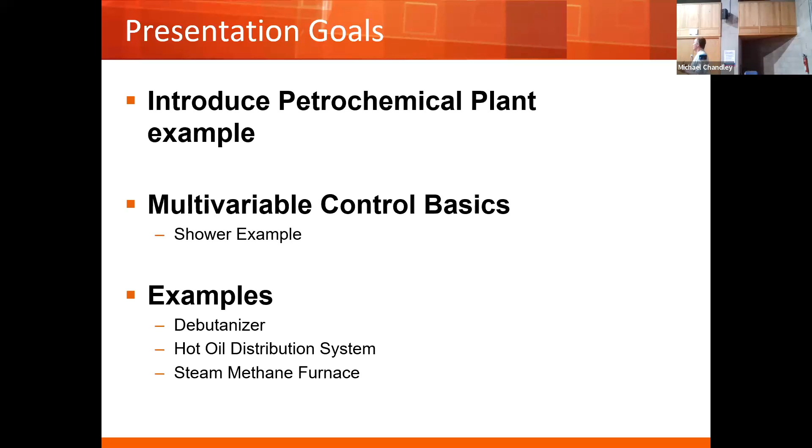First, I'd like to introduce the project that I was working on in the Middle East. And because multivariable control was such a huge part of this project, with very complex applications, I want to first discuss the basics of multivariable control. Then I have three examples I'd like to work through: one is on a column, a debutanizer column; the second is more of an optimizing control application, simple but it makes money; and the last one is a unique one done quite a few years ago on a furnace. More than anything else, I want to seed the discussion so you can be thinking about this as you're going through your schooling, and also what potential applications you might have.

So let's talk a little bit about the plant that I worked in. I worked at a company called Sadara — I actually have the shirt on today. Sadara was a joint venture between Saudi Aramco, which supplied the money. Everybody knows Saudi has lots of money; they supplied $20 billion to start the project, adding another 10 billion probably later on because there were overruns. So they supplied the cash. The other JV partner was Dow Chemical, who supplied the technology and some of the people.

Now, a project like this was mammoth. I want you to physically think about this: a rectangle of 2 kilometers by 3 kilometers long, just full of process equipment. I think it was about $13 billion worth of physical assets actually in the plant, with 26 process units — half of those were the first of their kind in Saudi Arabia. There was so much pipe in this plant that it would go from Cork to Dublin 10 times, and there was enough wire to go from Riyadh all the way to London. At the height of the project, there were 60,000 workers on site from 120 different countries. So needless to say, this was a pretty big project.

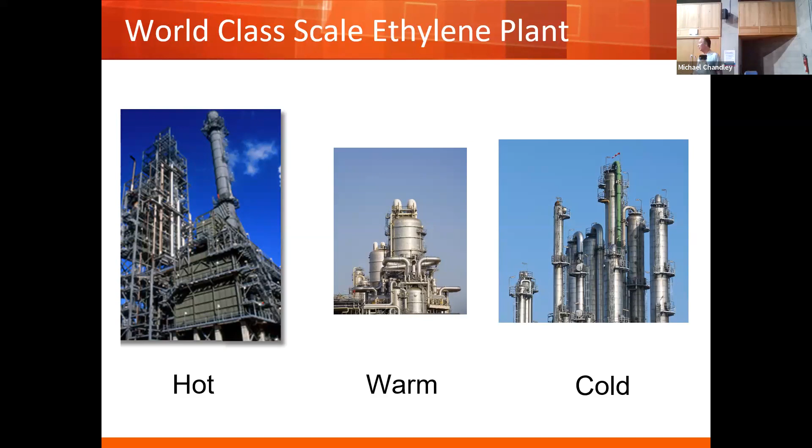All right, so what we have here is a lot of distillation towers that are there. And so the first tower was a depropanizer. And this was the most complicated depropanizer I'd ever seen, and I'd run into quite a few of these in the refining industry. And then there's a debutanizer, which is pretty easy. You're going to see not quite that example, but something similar.

We had a deethanizer. We had two deethanizers. It was an easy tower. And then we get to the demethanizers. The two demethanizers are getting to be more complicated. Now we're starting to get down to that minus 100 type of variable right there.

Then we have the C2 splitter. The C2 splitter was one of the more interesting towers I've ever seen in my career, and I've seen a lot of distillation, because the C2 compressor was literally part of the process. It was the top section after the vapor exited the tower, went through condensers, and then it took part of that liquid and sent it back as cooling through the rest of the process. And then we pulled some off as product. So that one was just super, super interesting.

And the reason multivariable control works as well as it does is wherever you have a lot of interaction, it's almost impossible to do it very well through traditional controls.

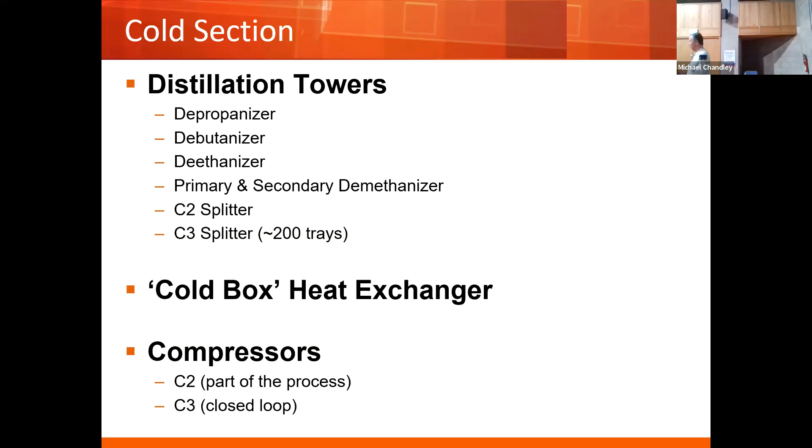All right, so what is multivariable control? It allows us the ability to simultaneously control multiple hard constraints, those variables that we normally think about controlling to a set point. In the controller itself, it's really not a set point per se, it's a range, and you can collapse them together, then you get real set point control.

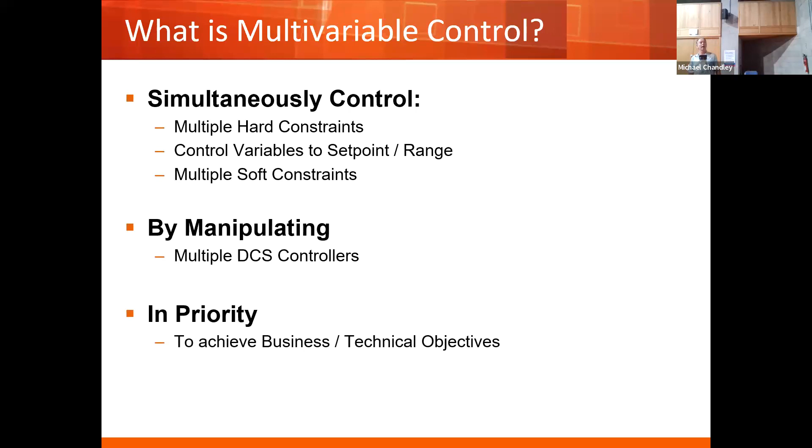There's a lot of flexibility in the way you set this up, with multiple soft constraints. The only difference between hard and soft is the ranking that actually occurs. So by manipulating multiple DCS controllers, most of the time it's DCS controllers—it doesn't have to be, but it normally is—in a prioritized fashion to achieve the business and technical objectives, using plant-derived models. So that's multivariable control in a nutshell.

Now, all of us are familiar with multivariable control. We practice it hopefully every day when you get in the shower. When you're taking a shower, you want to control temperature to a pretty narrow range, and you also want to control flow—you don't want it too low, I've had that in various hotels I've been in, that's not a lot of fun. But you don't want it to be a fire hydrant either, so you want some range.

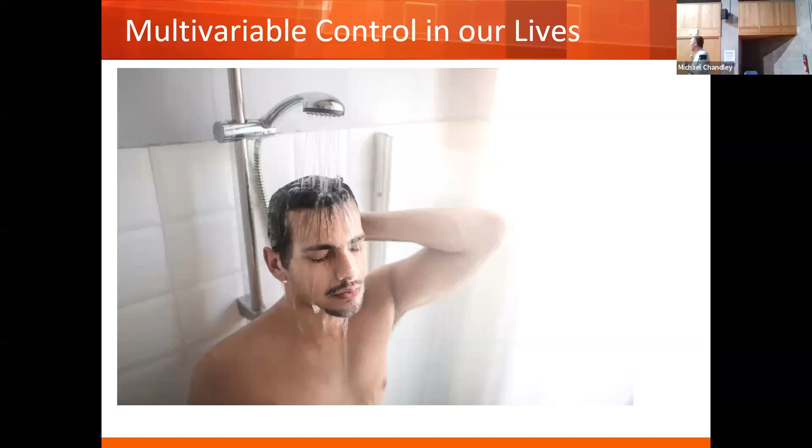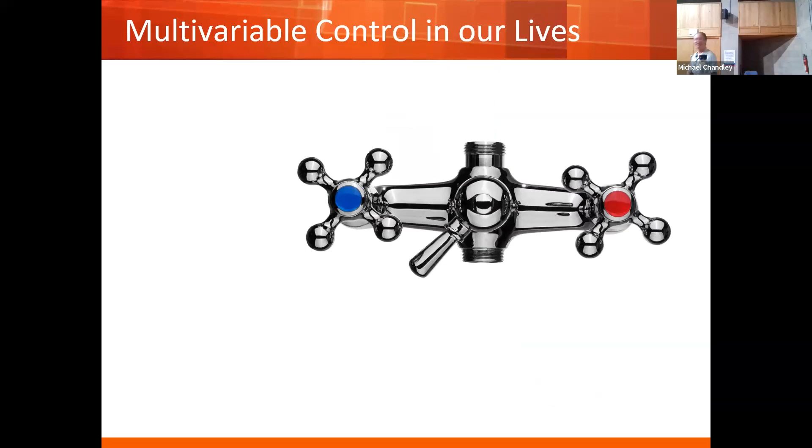Now, temperature is a little bit more important than the flow, and you do that by literally manipulating a cold and a hot water valve. In the parlance of process control, we refer to MVs as handles. So this is an interesting situation where it literally is the hand that's there. And there are certain disturbances that may happen—I hope that doesn't happen to you often when you're in the shower, because it can cause a lot of different problems.

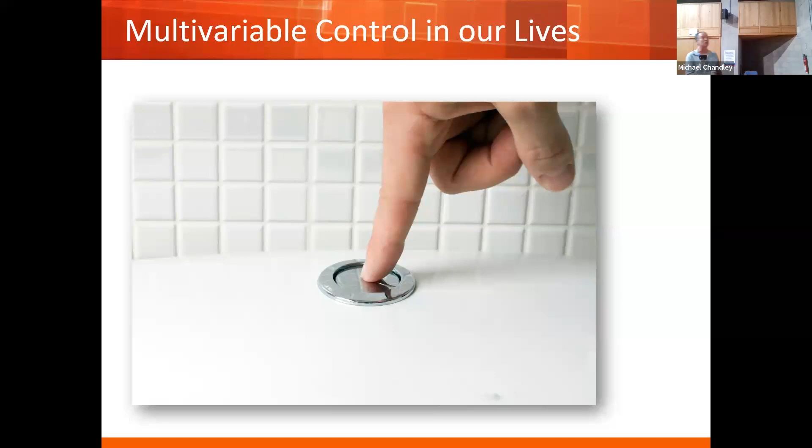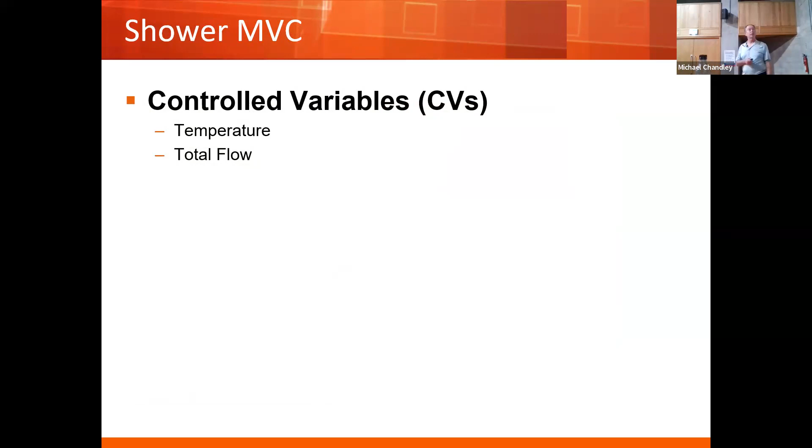All right, so that's the structure. This is something I'm going to use throughout the rest of the presentation, and this is the structure we want to think through these problems with. The first line in the controlled variables is going to be the highest priority, so temperature is the highest priority, and flow is the second priority. Now, manipulated variables, we already talked about those. And the disturbance variable is the water pressure that exists.

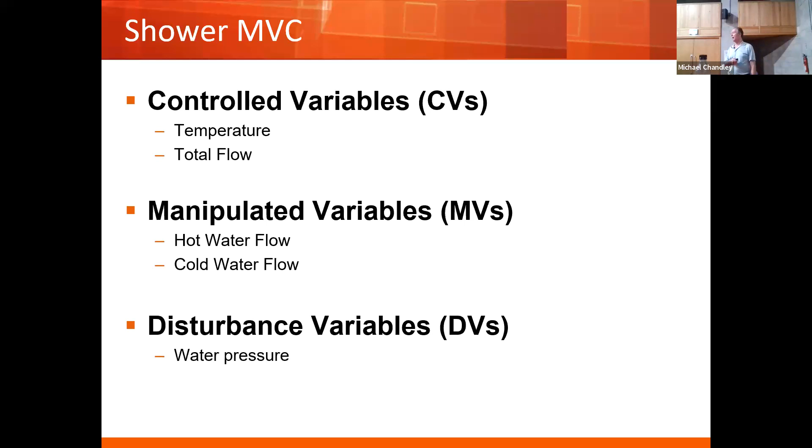Now, this is a model-based controller. I'll talk a little bit later about how these models are actually derived, but I want you to think about these as the dynamic relationships for a nominal change in a manipulated variable. So how do we read this? The rest of the presentation, these are the CVs in the columns—the one farthest to the left is the highest priority, and as we move to the right of the screen, they become lower priority. Then we have manipulated variables, hot and cold water, and the disturbance, which is really the water pressure—somebody pressing the toilet button, for instance.

So if we have a nominal change in the hot water flow, this is the dynamic response you see for the temperature: there's a short dead time, then it rises up, and we obviously increase the temperature from doing that. Same thing with flow—short dead time, then it increases up. Same thing with cold water, except the temperature obviously goes the opposite direction.

Now, down here for the water pressure, you have something that's very important: we start off at one value, go through a dynamic change, and come back to exactly the same value. It's called a zero gain model. These are very challenging to work with in real life, but you often see them as part of a control scheme.

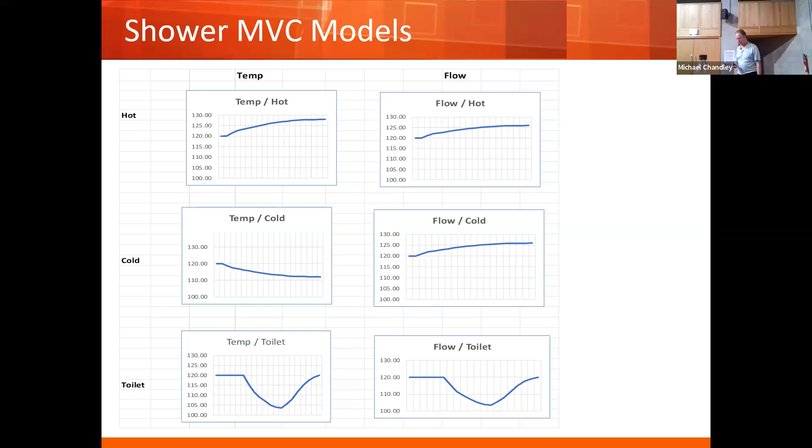Okay, so that's the basics of control. Let's go ahead and work through our first example. This is a debutanizer—there are 1,000 debutanizers out there. I've probably seen 100 of them myself in my refining work; each refinery has 2 or 3 of them.

So a debutanizer would normally handle what's termed wild gasoline. The idea is to separate the light ends—in this case propane and butane—from a gasoline stream whose vapor pressure has been adjusted. Now, in any distillation tower, we normally control both compositions at the same time, at least in a theoretical fashion.

However, in real life, you will have to give up on one and only control the other. There actually is a priority between the two. Because this gasoline stream is going to a certain tank, it can't take high vapor pressure. So it is the highest priority compared to the propane butane stream on the top. I want you to remember that because we're going to talk about that in a minute.

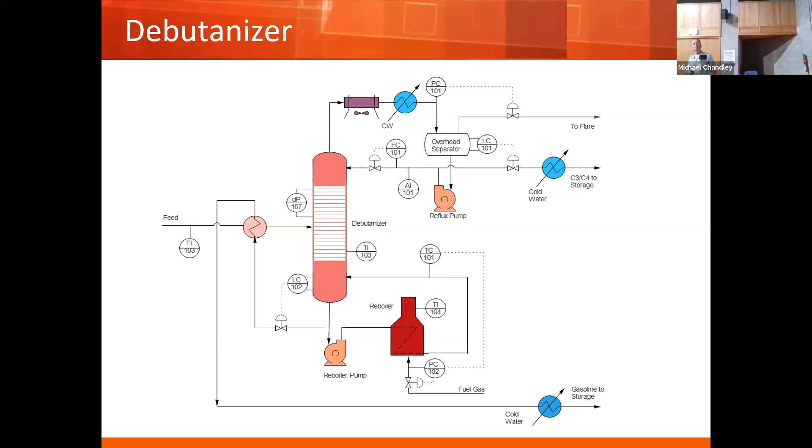Now, the word 'process' comes before the word 'control' for a reason, because it's the more important of the two words. We must understand the process before we can do the second part, and that is control. So one of the most important things we do on a project, and at Sadara we went through this many times, this is a simple example.

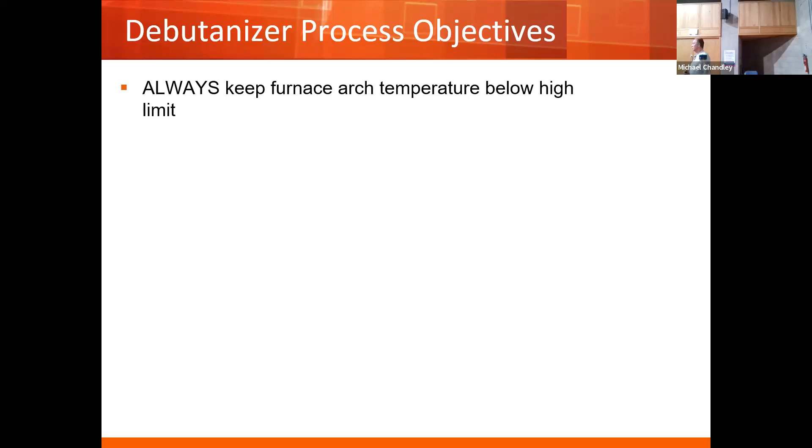We went through this many times where we had to make sure we got these exactly right. As we talked about this example, safety comes first. We're not burning down the furnace, so we have to keep the furnace arch temperature below its high limit. Next is an operational issue: we can't run a tower if it's flooding. So that's the next priority, and they are in exactly that order, right?

Then we get to the composition at the bottom of the tower. We already said that was more important than the top composition. And the last one, we know from chemical engineering that if we minimize pressure on a tower, we can reduce the energy consumption for the tower. So if we actually have an extra variable, maybe let's go ahead and reduce pressure on the tower. So this is the list of priorities.

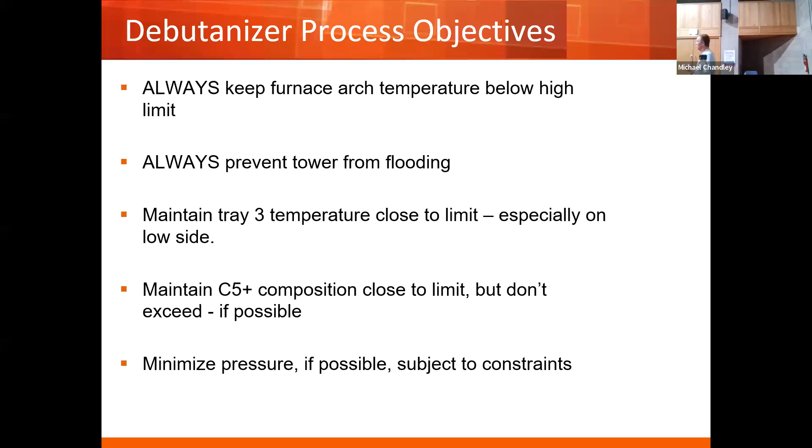Towers like the C2 splitter and the C3 splitter have a list of priorities about three times longer, and it entailed much debate with the operations people, who honestly kept changing their mind because they didn't understand how to work with it. So it took a while to work through it, but at the end of the project, everybody was truly on board.

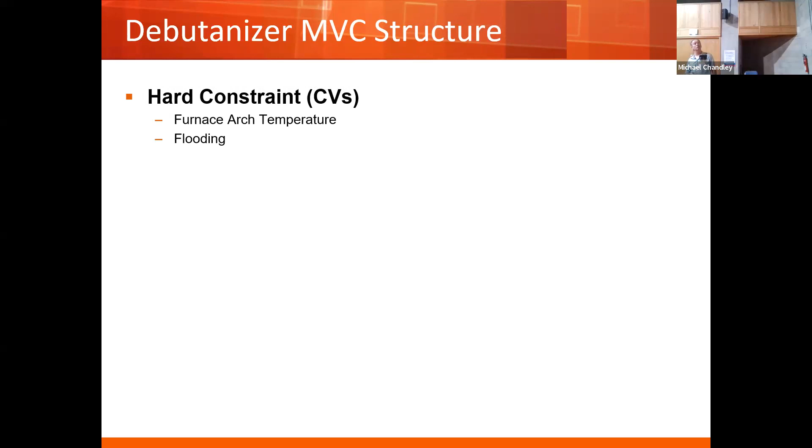Now we go from this structure, hard constraints, the order I talked about, arch temperature and flooding. Controlled variables are now controlled, roughly to a set point. These are the two compositions.

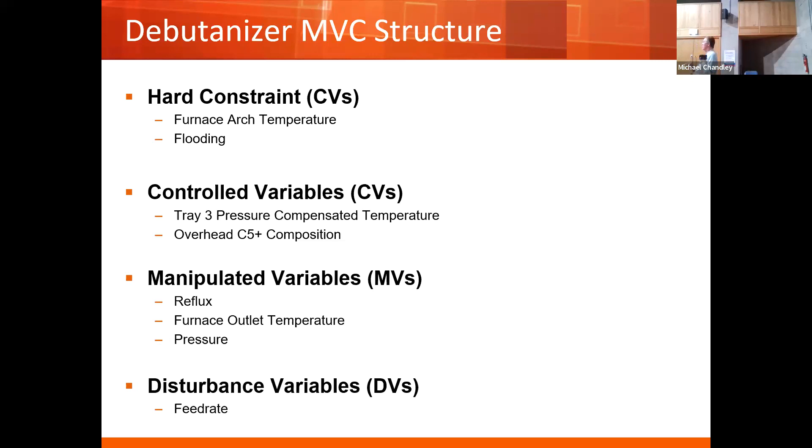Then the manipulated variable—it's a little older presentation than I originally had, so I changed it and saw my own error in there, but let's not worry about that. We had reflux, and then I adjusted it and changed it to be the furnace outlet temperature. Then there's a disturbance variable, feed rate. The feed rate comes wild to us from the bottom of the depropanizers. We have no control over it, but we need to adjust for it.

Now, something you're very familiar with mathematically becomes very important in a control context: degrees of freedom. If you have regular basic controls on a tower, like using reflux to control composition at the top or temperature control at the bottom, those are what we call SISO controllers—single input, single output, fairly straightforward. We're now in the MIMO world, where we have multiple inputs and multiple outputs.

So in general we have three cases. The first case is when the number of MVs is greater than the number of active constraints plus the number of things we want to control as set points. Active constraints actually mean something, because constraints can be there—we may be close to flooding, or we may be very far away from it. Same thing with the arch temperature constraint.

So if we have more MVs than CVs and constraints, this is nirvana. We can control all of our CVs and their constraints, and with any extra degrees of freedom—MVs left over—we can move in a direction that we want to. In this case, it would be pressure.

If we have a square problem, then we can solve the problem the way it is, but we lose that ability to use those extra MVs because they're needed for control at this point.

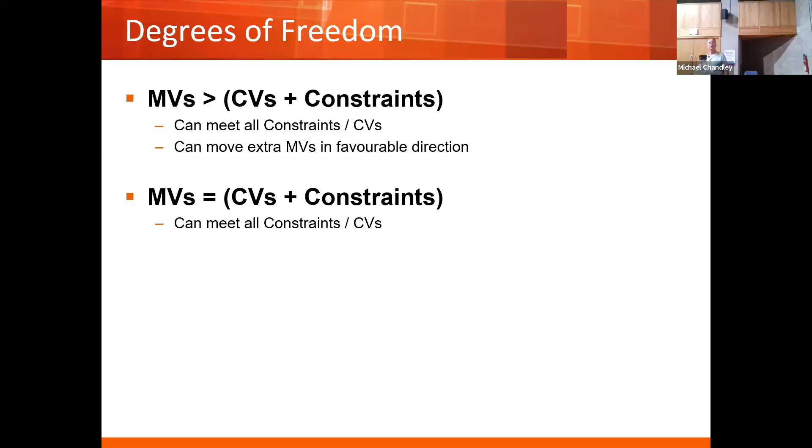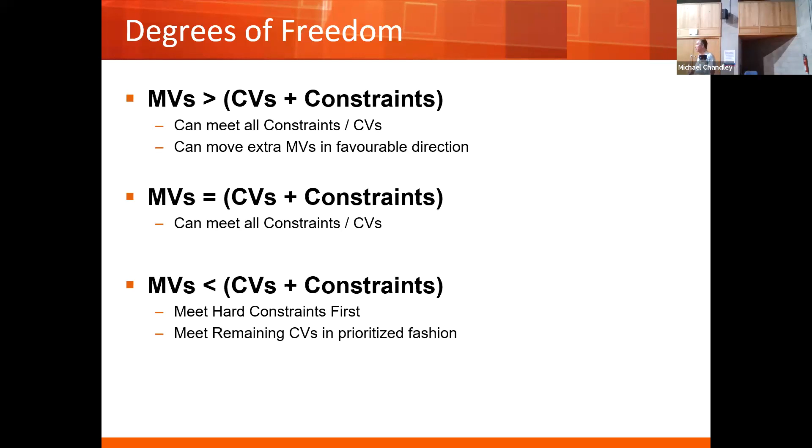Now we get into the 'life is tough' situation where we have fewer MVs than we have active constraints and CVs. This is where prioritization becomes super important—it meets the hard constraints first and then goes through that order we have there.

Now, I always train engineers that we're going to put together a grid that shows CVs versus MVs and DVs, because these are the pairings that we actually have. And we now put our process hat back on—we really spend a lot of time thinking through the process side of it instead of getting to the exact model.

I train engineers to think in terms of: is this a strong handle, a medium handle, or a weak handle? Let's just start at a conceptual level. It made it a lot easier to work with the operations people, because this is stuff they live and breathe every day. So let's start with our strong models first.

So if we look at this—same structure we were talking about before—our most important priority is the furnace arch temperature, then the highest priority flooding, and then the compositions as we move on over. Arch temperature is only affected by the furnace, so that one's really straightforward.

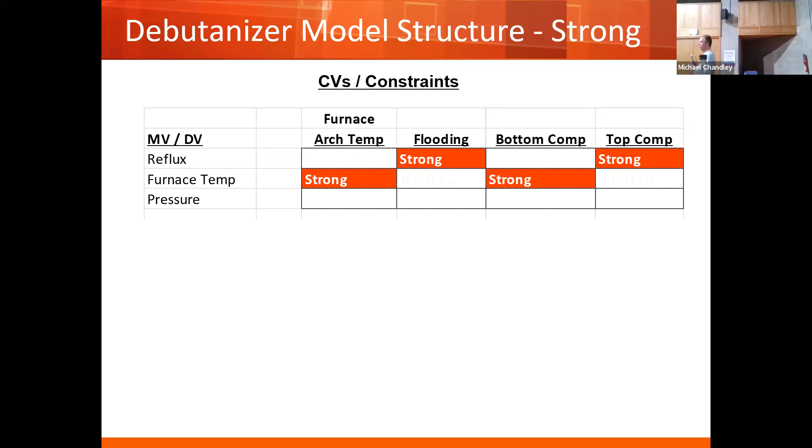Flooding is affected by just about everything to some degree, and the models will show later which is the strong, weak, or medium handle—I just put this up for purposes right now. Then the bottom and top composition are controlled exactly the way we control the tower in real life with SISO controls.

Now it starts to get more interesting as we add the medium models in. Flooding is interesting because just about everything affects it to some degree, and we could use those in some combination to control flooding. Then, depending on how we configure the loops, the top composition would be affected by the furnace. If we leave the temperature-pressure cascade in place, we lose that handle at the top; if we break it, we get that handle back. After analysis like this, we'd see this hole and probably say we want to break that cascade.

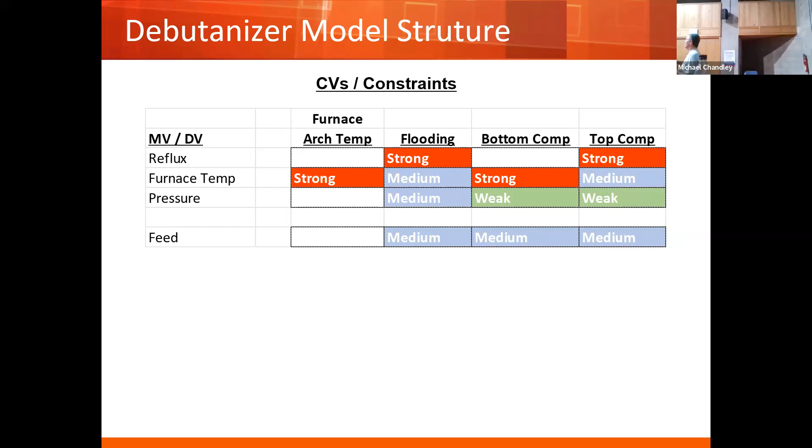And here's the DVs. Feed affects just about everything. We know it's going to affect flooding, and we're going to want to correct for that later on. We have a couple weak models, and that is pressure, tower pressure to the compositions. Now, we don't normally control tower pressure. I don't use tower pressure to control composition, but it does have some effect on it, and we want to know what those effects are.

Okay, so now we get to the models part. And it's again the same structure that we were just talking about, where we have arch temperature, flooding, and the compositions over here, reflux temperature or fuel gas pressure, and then feed.

So the idea behind the models is exactly the same as we just showed for the shower example. For a nominal change in the MV or the DV, what is the dynamic effect?

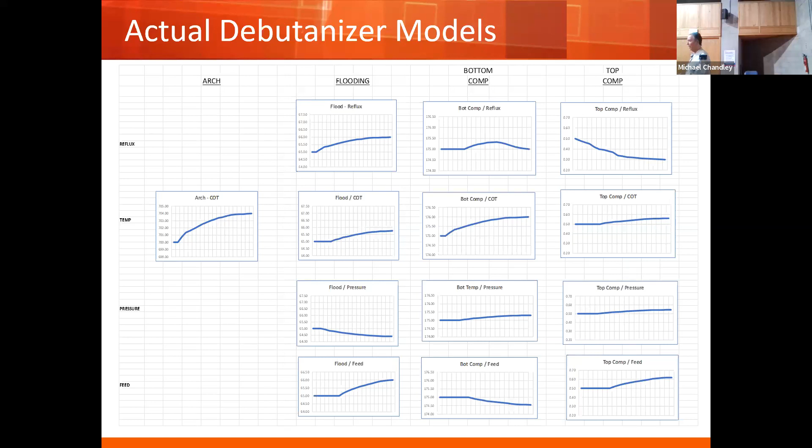That gives the controller some abilities to work with. Up here, this bottom's composition model, if we had left that temperature controller the way it originally was, we'd have this zero gain effect that was here. Even though it wasn't our handle for us on a steady state basis, it's still a handle for us. We have to still incorporate a dynamic effect. That's why we'd probably break that model and go ahead and make it a more linear combination.

So in real life, how does it work the way it's structured? Use the furnace. There's no other question about that. All composition control, everything else ends up being secondary.

Flooding, we have lots of possibilities that are here. We could use pressure. We have a pretty decent handle. And that way we still have reflux and furnace temperature here for our compositions that are over here. So you can conceivably get a situation where flooding is handled primarily through pressure, and we use our remaining handles over here to control our compositions.

Now, one thing we would probably do is that even though these are defined as MVs, the modern controllers have the ability to make these a DV only, so that you could set it up such that I don't manipulate pressure to control composition. So you get to all these interesting possibilities.

And so what I train an engineer to do is look up and down here to see what would possibly be used to control that particular variable. Also look across as to what does the MV touch, because sometimes things go away and you end up with some very interesting combinations. This is a small problem. When you get to the much bigger problems, you can't predict it ahead of time. That's the problem. That's why you need a really thorough process analysis.

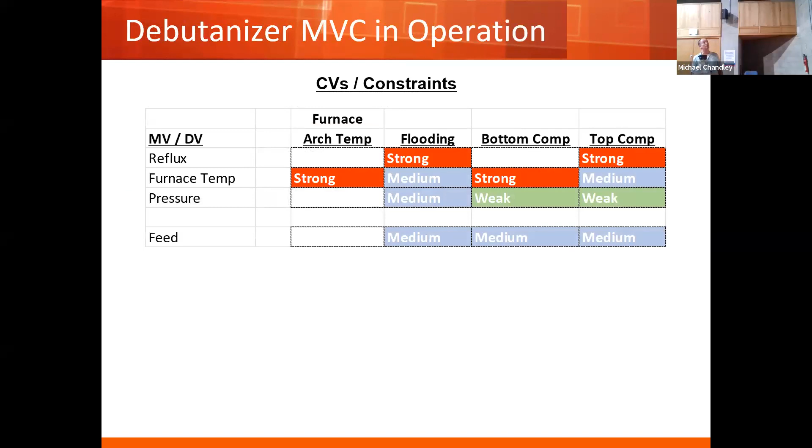Okay, so let's talk a little bit about how did the models get created. There are automatic step testing programs that are actually done. You start with a seed model. From that seed model, we actually literally turn on the controller the way it would control in real time. But it's a seed model, it's not a perfect model. It actually does a pretty darn good job with it, to be honest, which is pretty amazing.

So we start with that, and then what happens is we have this algorithm that moves it down by 10. It has all these different perturbations it does with all of the MVs at the same time. So you're just superimposing these moves on top of it. And you'll leave that algorithm or leave that running for a week or two weeks. It creates this tremendous data set for you to go ahead and analyze.

So you go through a model identification process. There's obviously you got to massage those models, you got to get the junk out of the models, etc. And then you get to the model review process. Your model review process is going to depend heavily on that analysis we were just talking about, looking up and down the columns and the rows to make sure that this is doing what you think it's going to want to do.

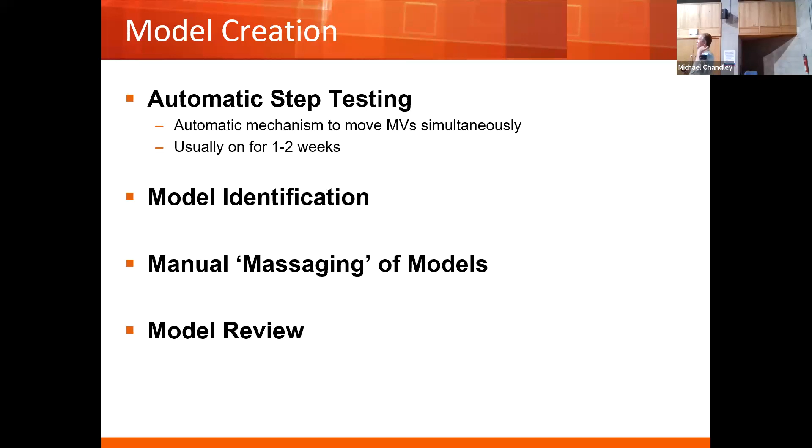We have a sanity check, and it's a very important one: 75% of the projects are at this step right here, doing all the testing and putting the models together. Okay, so that's the debutanizer.

I have two more examples I want to go through. One is a simple hot oil system, which I'm going to call an optimizing controller, because it doesn't really have a set point variable associated with it. Let's say we gave an operator the task of looking at the system and only choosing this temperature set point, such that none of the controller outputs run out of room.

So let's step back and talk a bit more about this. This is six parallel exchangers, let's say six towers. There are temperature controllers on the process side that adjust for distillation reasons and know nothing about the utility side. There's a DP controller over the top part that keeps it in range so it doesn't back out at one end or the other. It's the same furnace as before, with the same temperature constraint.

So if you gave an operator the task of looking at that all day and reducing the temperature whenever there's room to do so—let's say the maximum controller output right now is 70% on one of the valves, so we can go ahead and reduce it a little. We reduce it, and 20 minutes later we look back: oh, it's up at 72%. We can go a little farther. Now we're at 74%, and it continues on.

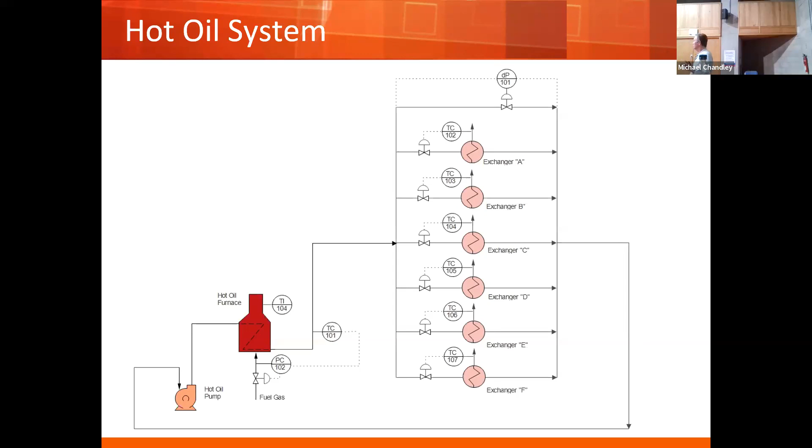All of a sudden we get to 90%. Yeah, I think we're kind of there right now, and we want to back off. Oh, 92%, we need to increase it a little bit. Then all of a sudden that particular tower doesn't need as much heat—somebody cut its feed, so it went down to 50%. Now we look at the next highest one, which is 70%. Yeah, we can go down a little bit so it can ride a different constraint that's there. That's the general idea behind it.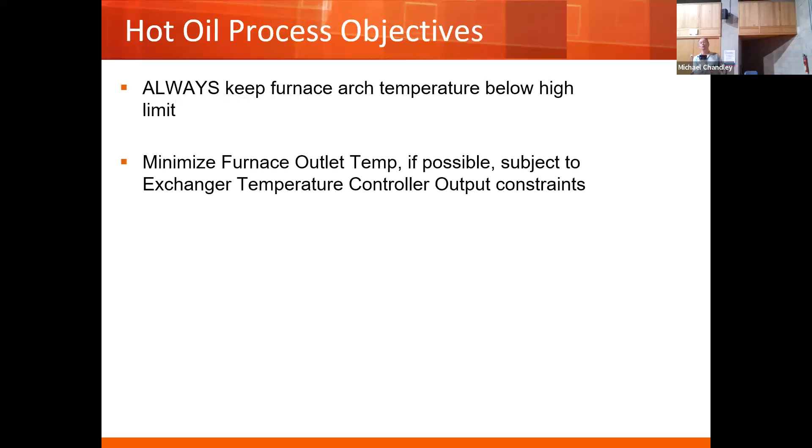So again, same arch temperature constraint—we just talked about minimizing the outlet temperature subject to the controller output constraints, while also keeping the DP in range. So we have the hard constraint, which is the furnace arch temperature. I probably would not call that a controlled variable; that's really a hard constraint, is what I'd call it.

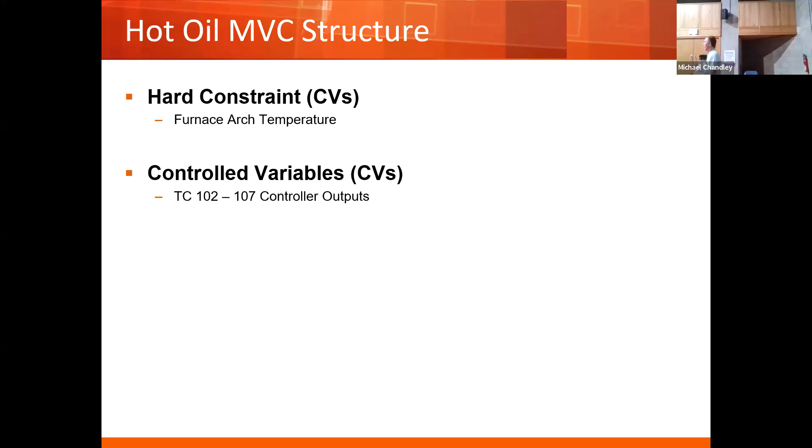Now, you're not used to seeing controlled variables or CVs as temperature controller outputs, because that's not normally how you'd think about it. But you can do a tremendous amount of good using multivariable control by looking at when a valve goes wide open or closed and taking advantage of it. The variable is the furnace outlet temperature, and in that application, all it does—it's a simple application—is optimize and only put enough heat into that furnace, ever, compared to what an operator would do. Most things like that are totally forgotten about, and they just waste money. So it's a simple application.

Let's start here. This last application came out of an ammonia plant in the panhandle of Texas. The ammonia process has two key pieces: one is the reaction section, which combines hydrogen plus nitrogen to make ammonia. But the front part of the process has to produce the hydrogen, and the typical route to hydrogen in the process industries is steam methane reforming, though a couple other processes exist. This is a mammoth furnace, running at temperatures very similar to the ethylene furnace we talked about earlier. So let's talk about the inside of the furnace first.

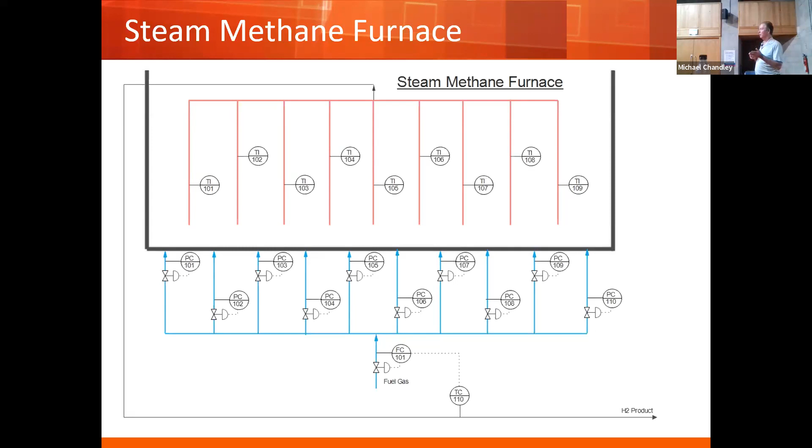If we're looking at 2 minus 1, and we increase this pressure, we're obviously going to drive T1 up higher. Over here on 3, if we increase that, it would drive 2 up. Now the one in between is dicey—we don't know what it would do. You might even zero that out because it might be so close to one another; one time we increase it, another time we decrease it. So we zero it out.

But let me show the structure. Since we already have this up: the way this was set up is that the control variable is still that main outlet temperature. We adjust what I'll call soft constraints—the delta T's, about 10 of them. Then down here we have the flow controller that was underneath the temperature controller, and the 10 fuel gas pressure controllers. So we have an 11 by 11 problem, which means we should be able to solve this completely.

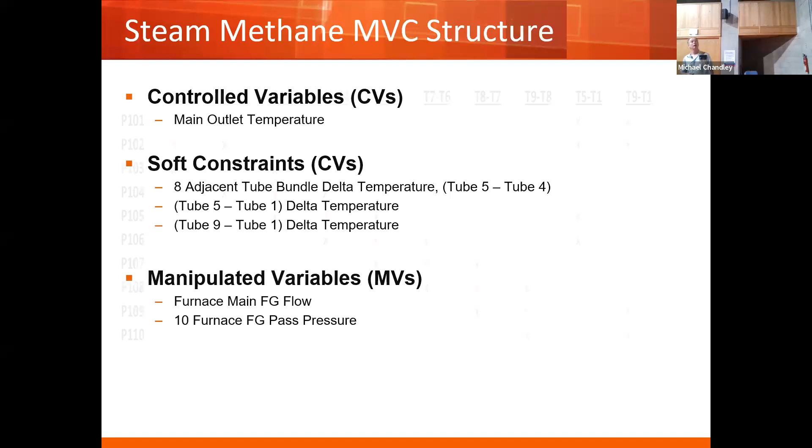Going back to the delta T portion of the problem: we have 2 minus 1, 3 minus 2, 4 minus 3, etc. As we described, for 2 minus 1, pressure 1 affected that, and pressure 3 affected it too. I have a red X for the other one because that's a little dicey—we're not quite sure what it is. You can see most of this matrix is sparse, mostly zeros, because if we move the first pressure, it's probably not affecting the last tube on the other side, and we probably don't want to do that from a control perspective anyway. So we'd zero that out and let the big handle the action.

And then when we get to 5 minus 1 over here, these start to affect the outside of the furnace and the middle portions of the furnace, depending on which one of these two was there. So that's the layout of the problem.

So literally when we turned this on, within about 3 hours, the entire furnace flattened out and stayed there for the next 20 years. Give me a little bit of a royalty for that application—I'm thinking maybe I wouldn't be talking tonight. But this shows you the power of control: you can take what seems to be a problem you wouldn't pay much attention to, and solve it in very unique ways.

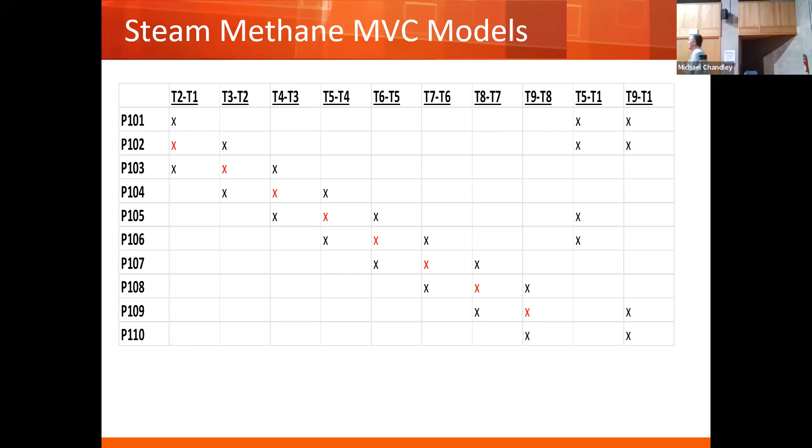So before we conclude, I want to step back and talk a little bit about the benefit side of this. All right, what are the benefits? One of them is just because of the predictive nature of control.

I want you to go back to the debutanizer example for a second. An operator has a model in their head when they run the units. But on that debutanizer, in order for the human to be able to comprehend it, they'll only make 1 or 2 moves to a tower an hour and wait for it, because they know what they're expecting to have happen. The human can't comprehend the idea of moving the reflux up by 5 barrels this minute, another 3 minutes down the road, down by 3, up by 4, and then trying to figure that out for 1 MV. That's a hard problem to do for the human.

I can't do it. Now, if we add that to all 3 MVs and do this simultaneously, there's no possible way I could figure it out. But what the computer can do is fantastic, because it has a picture of the model already from what we went ahead and did. There's a bias calculation that runs before the calculation gets to the control part when it chooses the MV, so it updates its model automatically as part of it. So just the sheer calculation efficiency of the models is so superior to any human.

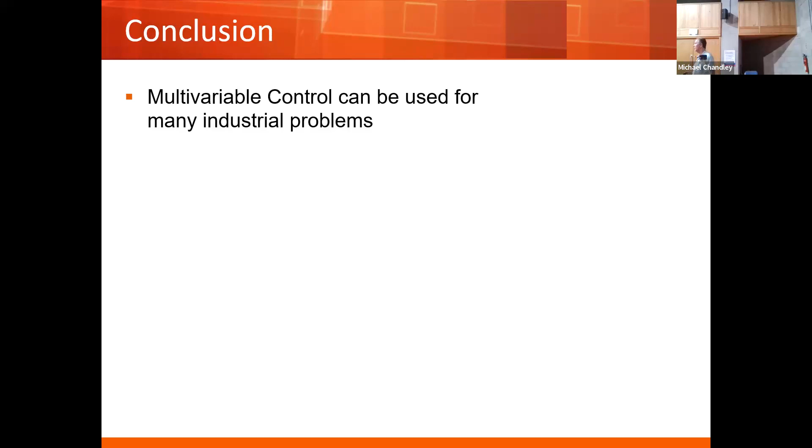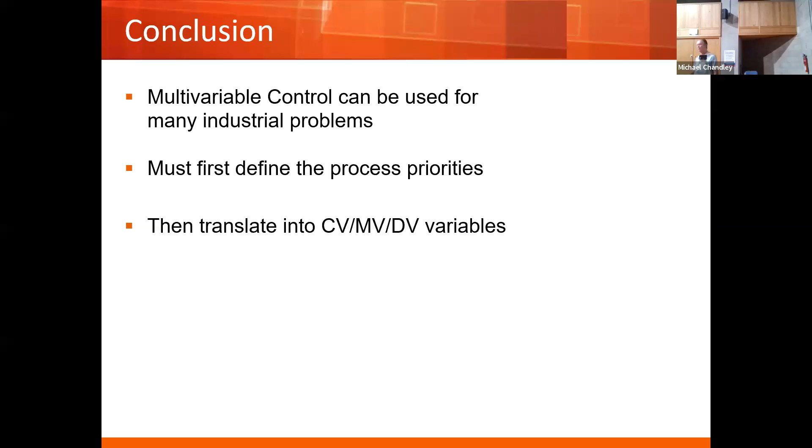So multivariable control can be used for many different industrial problems, and not just petroleum or oil refining. There's a lot of places. You have to define the process priorities first, as we did. Translate those into CVs, MVs, DVs. We have to go conduct those step tests. And then last, commission and train the operators.